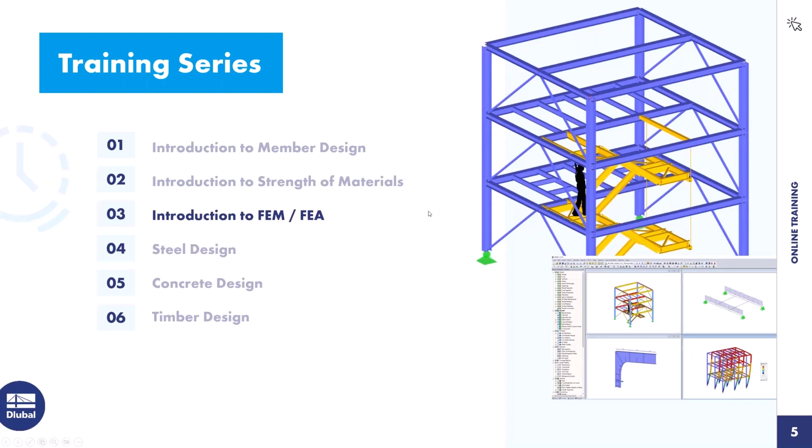In today's presentation or training, we will go through several different topics. First, I will introduce you to the basic principles of the finite element analysis, which means I will just do a few slides on the basic principles so you can remember the stuff you may have already learned in your studies, and have a better background knowledge on the stuff we will do right here. The next point will be an introductory example with a continuous slab, followed by a short theory on the plate mechanics and plate calculation theories.

With the last two topics, we will go on to the nonlinear calculations, so the more complex stuff. Not really hard into theory, but we will show you what RFEM is capable of. And the last thing we will inspect will be the singularities, so one kind of big problem in the finite element analysis, and we will try to figure out how to solve them or at least minimize them.

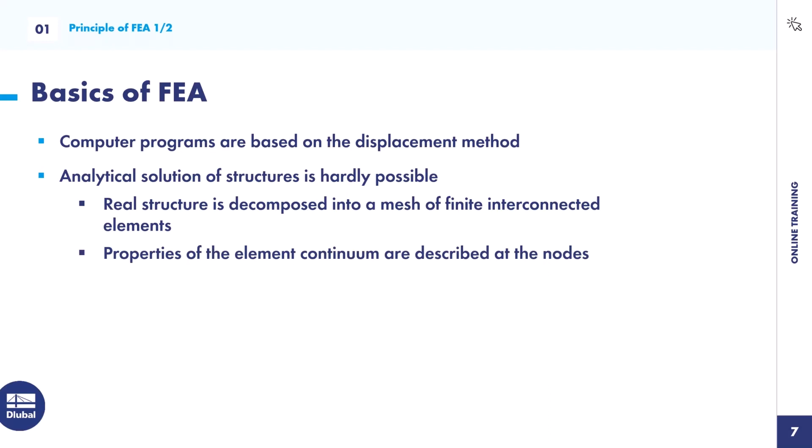This means at each border from one element to another element, you have, for example, a displacement in z direction, and it must be equal. So you have some equations which have to be satisfied.

And for inside the element, we have approximations. So there are different approximations and several programs can use different approximations. Also, there's the difference between linear approximations or third order approximations, which would be a more exact calculation, but also result in a more demanding computer power.

The next thing would be the discretization. This is an important term in the finite element analysis. The discretization means that the structure itself is decomposed into these finite elements, into these small elements.

And to make it a bit more clear, we have it also in a sketch where I will explain it just simple in 6 easy steps how a finite element analysis calculation is carried out. So the first step would be the discretization. That means we would split up the model, in this case a slab with an opening, into its small elements.

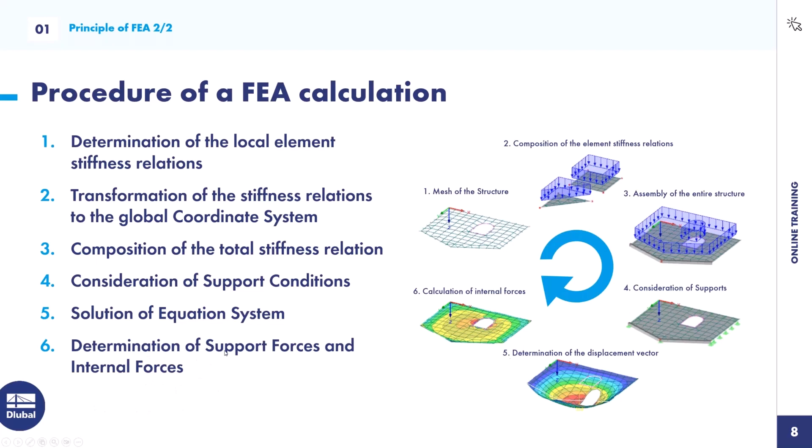Now we can just start on modeling. I will just enter RFEM. So if you model along, you're welcome to also open RFEM 6 now. And what we will do is we will create a continuous slab, and we will adjust the mesh size for the same slab, and we're gonna inspect the results. So we're gonna inspect how the mesh size will influence our results. Also, we will compare it to a simple beam, just like one of the easiest structural systems. We will investigate and inspect the problems of the mesh size.

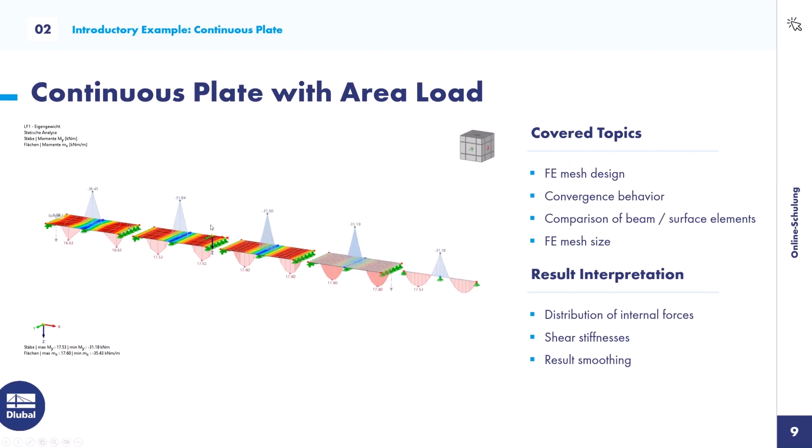So now our RFEM should be ready. Not quite yet. But okay, in the meantime, we can also do just another poll.

I prepared one according to the discretization. Let's go. What did I mean with the discretization in the finite element analysis?

Okay, perfect. I will close the poll. And the result, it's quite surprising. I never had this before. So 100% of you were right. It's the decomposition of the structure into small finite elements. Perfect.

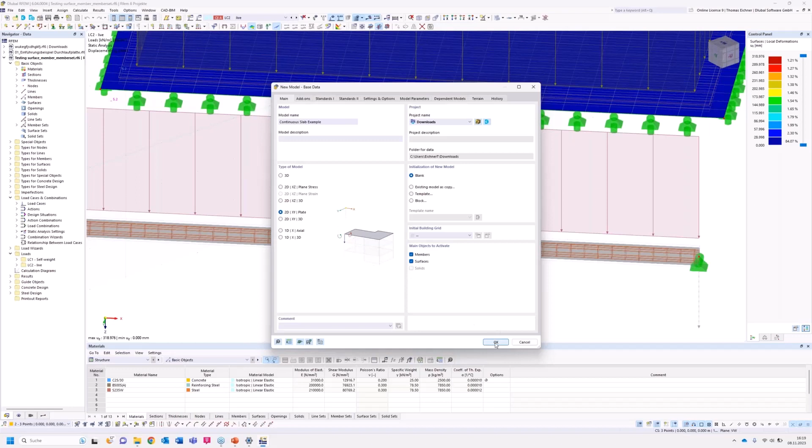With OK, the new model will be initialized, and we get a completely white screen, just with our global coordinate system at the origin and our complete guidelines for modeling.

Since we want to start from zero today, and the basic program option is to use the materials, sections, and thicknesses from our last model, so we don't have to create them each time completely new, we're just going to delete all the previous basic objects. That's done right here at 'delete all basic objects'.

Now we are at our free model, and we can either use this view cube, or these buttons, to change our view on the system. We will want to look in the Z direction from above, so we'll press this Z direction button, and then we are ready to go.

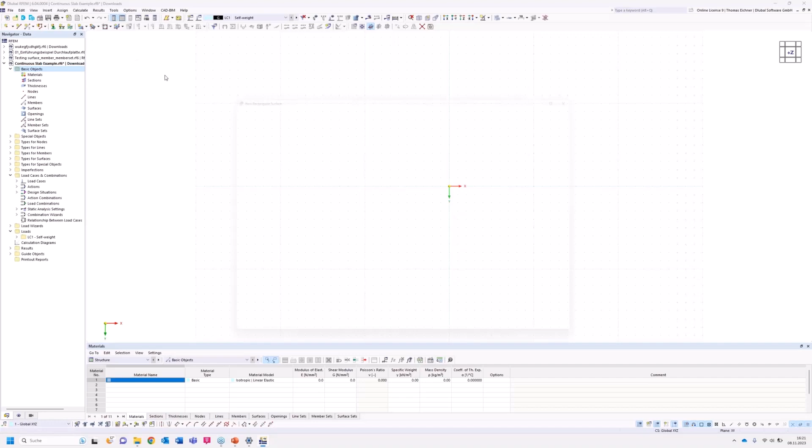Right here we can create our thickness. Just for your knowledge, if we don't have a thickness and try to press OK, it will warn us that we have to create a thickness. So the program won't let you do complete nonsense - it's going to help you at each step of your modeling process.

Now we'll click here, and it will automatically start the dialog for the thickness. We will go for 30 centimeters, meaning 300 millimeters, not 3000 of course. Then we'll continue assigning a material to this thickness. For the material, we have a few options.

We can either go into this library - the book symbol is always a library - and filter it by region or material subtype. We could also search here below, or alternatively we could just search directly on top.

That means we will go with the German one - I'm from Germany, so I'm only using the DIN norm. It doesn't really matter for C30/37 since it's standardized for the whole of Europe, and it wouldn't make a difference to choose something else here, at least for C30/37.

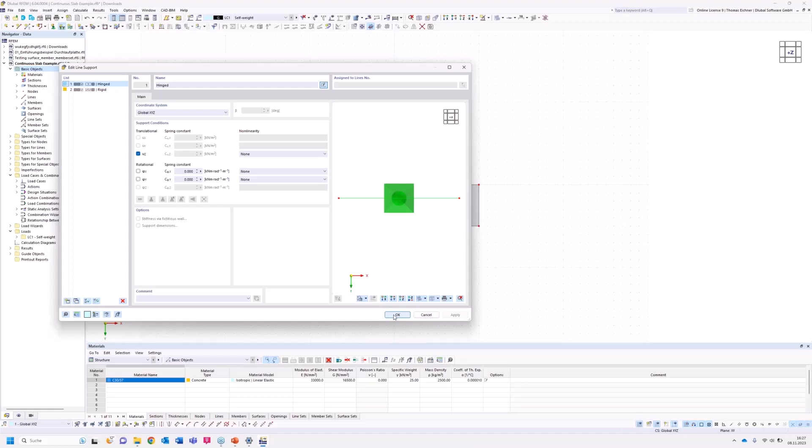Okay, we can then apply it, and by clicking from the right hand side to the left hand side, we will apply it to every line that is cut with our rectangle. So after this is done, we see...

We have now our support. We can also adjust the size of our support, and we can continue on.

This was in the presentation, I think about step 4, where we block some degrees of freedom. So we strike out some equations from the K matrix, and we also strike some degrees of freedom in the U vector.

So now we have the K matrix ready. We also modified it with boundary conditions, and we have the U vector also modified, though it's unknown until after the calculation.

And the last part would be the force vector. So for the force vector, we're going to make it simple and just apply an area load of 10 kilonewton per square meter.

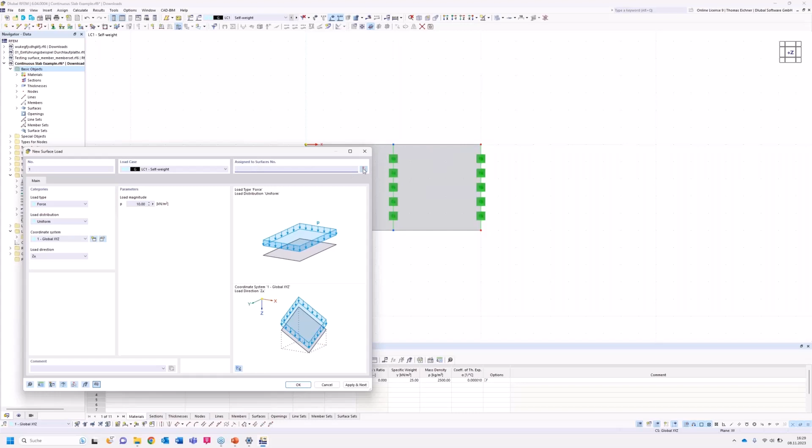We could just enter surface 1. Since we only have one surface, it will be surface number 1. We could select it, or we could just leave this empty, click OK, and select it afterwards.

After applying it, we're going to inspect the appearance of the load. Back in the view from the top, we can see the system. And in the next step, we can just select everything we did...

...and use this button here. This means it moves or copies the selected objects. In this mask, we already see on the right-hand side what will happen. The selected one will just be copied or moved to another place.

So we want to have 4 plates, so we create 3 copies of the system, and we will move them 10 meters.

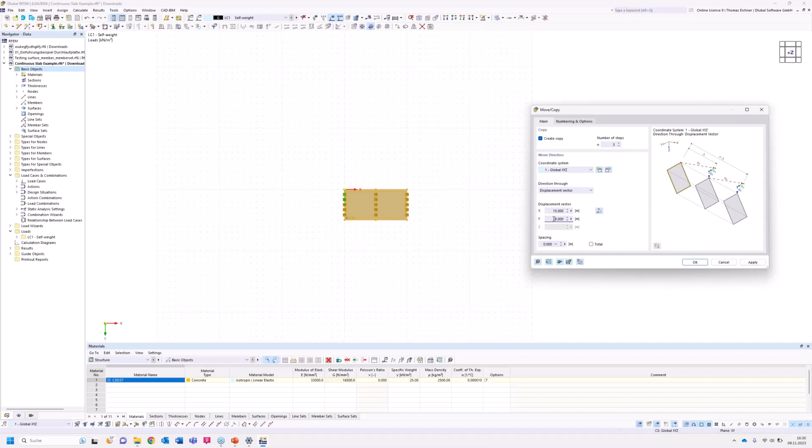Right, 15 meters. Our system is 10 meters long, and so we want to have 5 meters space in between, and then we want to have the next system. So we will have 3 copies with 15 meters in between.

After doing it, we will have them right here. And now we see our helping grid is not helping anymore on the last surface, but I need it for the beam, or I don't need it, but it helps me a lot.

So we will go into settings for our work plane and grid, and we will just adjust the number of grid points. I will just take way too many, like 200, and I will also adjust the grid spacing from 1 meter to 0.5 meter. It's not really needed, but it's possible, so I will just do it.

With OK, we can see the result. We have now a new grid, and it's over the whole system we want to go through and inspect the results on.

So the next thing we want to do before we model the beam would be the mesh size. Right now we don't have any specific mesh size for a surface.

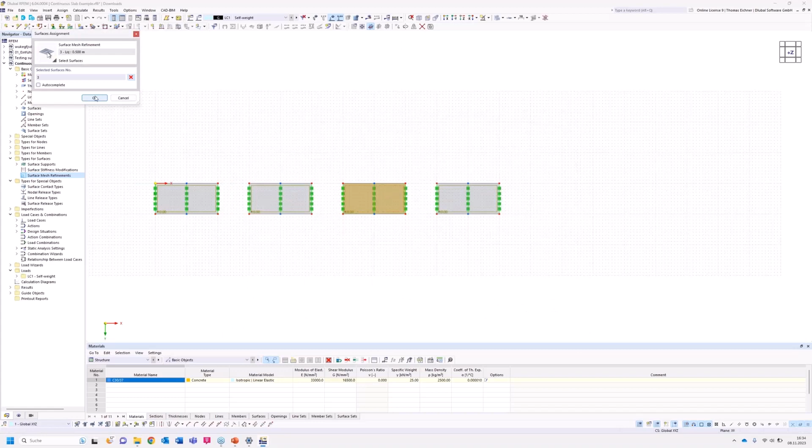Now we have the properties, but we didn't assign them to any surface. So we're also going through the different 4 refinements and assign them to the different surfaces. The first one with 2 meters for the first surface, the second one for the second surface, and so on. Rinse and repeat.

Now, after finishing the 4th one, we didn't apply it yet. We can either apply it right here, meaning now we can see something - I will explain it in a bit. But the positive thing about the apply button is we will stay in the dialog. So if we had more surfaces and wanted more mesh refinements, we could just go on and create new ones.

If you click OK, the dialog will be closed and it will be applied. It would be possible for our case as well.

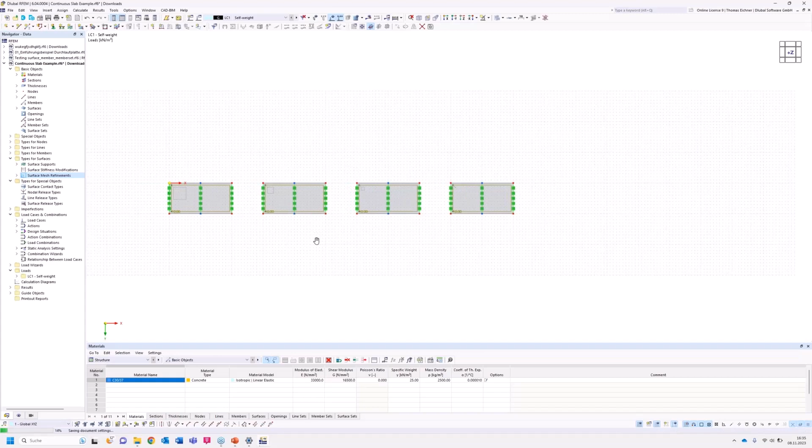Now we can also see these squares in our surfaces, and those show us how the mesh size will be. This will be very coarse and this will be extremely fine. You could estimate this will be round about 1,000 more elements than the first one - meaning maybe not 1,000 more calculation time, but let's say 5 times the calculation time. It's just an estimation.

So for the comparison, we will also create our beam. The beam will be done with this button on the top left side, this section. It will be a new one since we have none yet, so we go into this create new section.

We want to have the only material we have already, the C30/37, and we want to have exactly this rectangular object. The rest here doesn't really matter for us right now. I will go on with something later, but we could also inspect the section properties.

To adjust the size of our rectangle, we can go to this parametric massive section. And here we want to have a width of our system of 1 meter, so 1,000 millimeters, and the height of our system of 50 centimeters.

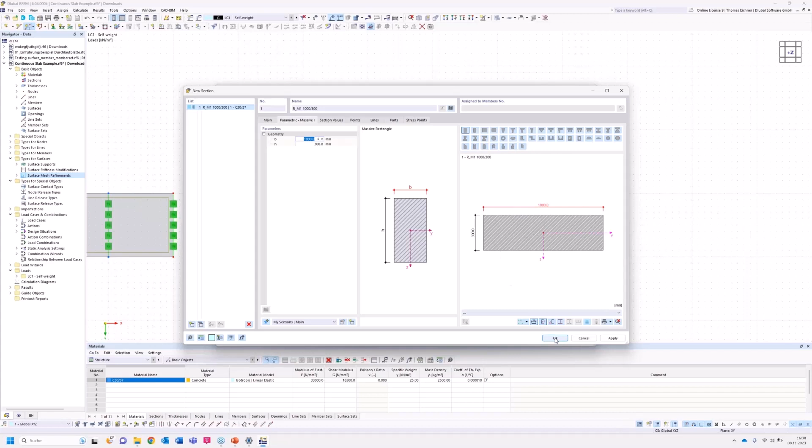We can press OK and OK and go on with the modeling. Now we will just go again and create this 10-meter slab - well, not slab, but our beam.

This beam will be divided since we need a support in the middle. We can just go on this member, go on divide member with intermediate nodes. I could also go on distance with 5 meters, but we will take the more simple method: one intermediate node, very easy.

We will also use a new function here, create on member node. I'm just clicking it and pressing OK. Now you see this blue new node. The special thing about this on-member node is we didn't divide the member. This is 1 member. If we didn't check this function, it would be 2 members now.

So it's just for more complex systems. You don't want to have hundreds of thousands of beams just because you have beams coming into other beams and so on. For our purpose, this doesn't really matter and we could go for both options.

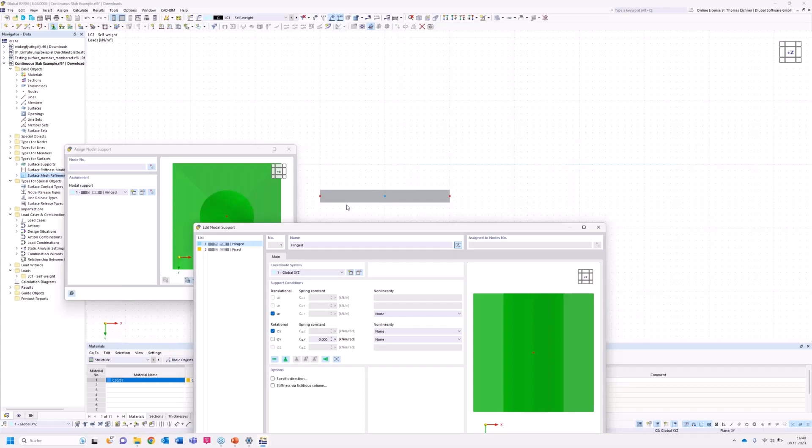So after doing this, we have it adjusted right here, press OK, and assign them to all the nodes. Last but not least, we can just add our member load, again with 10 kilonewtons, this time per meter. Press on the slab—well, not the slab but the beam—and we're ready to look at this in 3D, since it looks quite cool now.

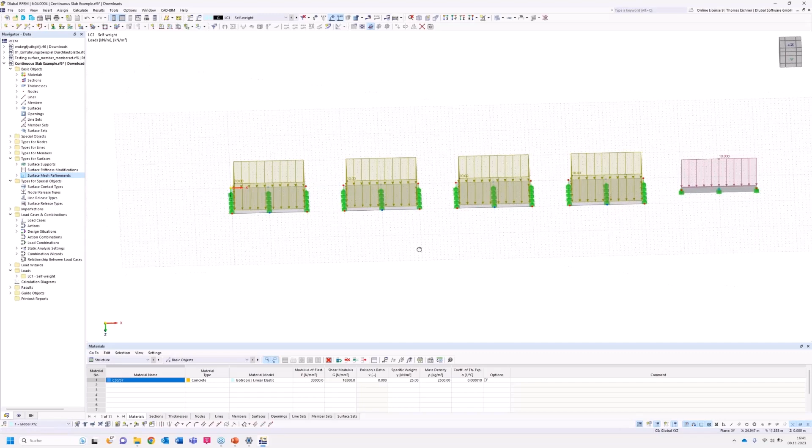Just a few simple steps and we have our systems. One more thing, we can also do this for loads. We can adjust their size. Before the calculation, I want to do two more things. That will be, again, view in its Z direction.

Now we will create our result section. Result section is a special object, so we find it in the special objects. We double click it, and we just use the basic settings and take our first two nodes from here, from the middle left to the middle right. We press OK. Now we can see we have added this result section.

Now for better investigation of our loads or of our results, we will also deactivate the self-weight. So we go into the load case and deactivate the self-weight. Now we're done and ready to calculate the system.

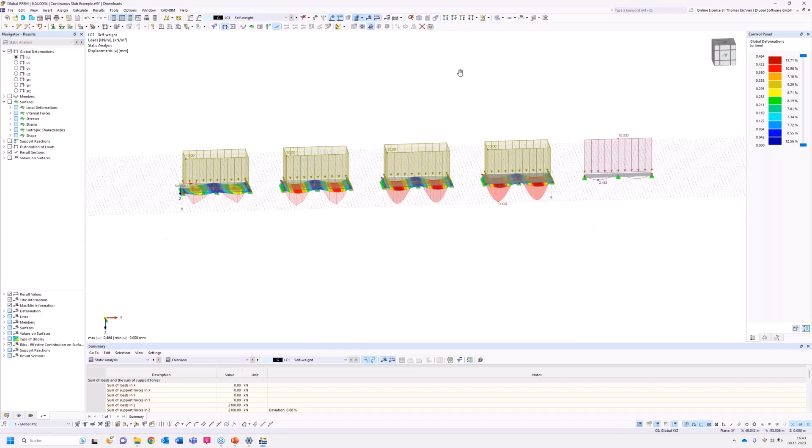So we have our results now. We have our results also on the result sections. We can adjust our values to be displayed right here at the values on surfaces.

And that seems to be wrong. We have to go result sections, values on result sections. There we can go on local extremes. And that means we just have our results.

Now we can see the different shapes and we can compare the deformations. We can see we have here 0.34 millimeters, I meant. And we have here on our comparison beam 0.46.

So there's a big discrepancy between this coarse model and our beam. This 0.464 seems to be really accurate, but also our not-so-fine mesh did result in comparable deformations.

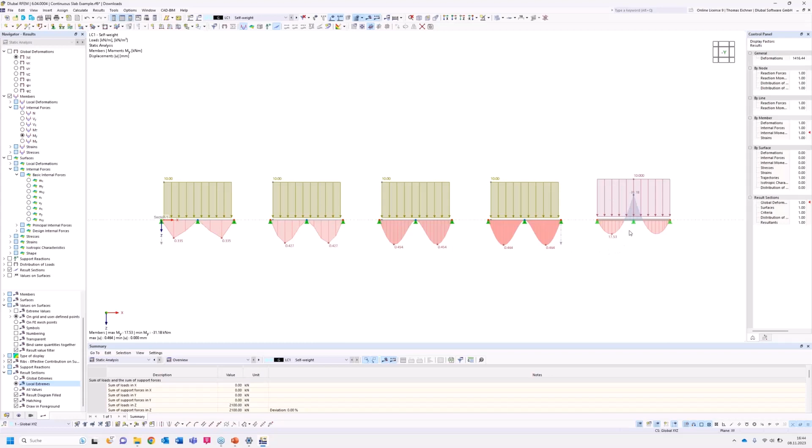We'll also investigate this on the internal forces. So we go on the members, the internal forces, and we will look at the moment about the Y direction. This is the moment rotating about the Y direction for beams.

For surfaces, it won't be the My. The My should be 0, but we will go for the Mx. Why is it now the Mx and not the My? For surfaces, there's a different definition for internal forces.

Mx means now we will follow the x-axis. We will cut the slab with a plane perpendicular to the x-axis, and then we will rotate around the corner of the cut. So it's a cut perpendicular to the x direction, and then we will rotate around it.

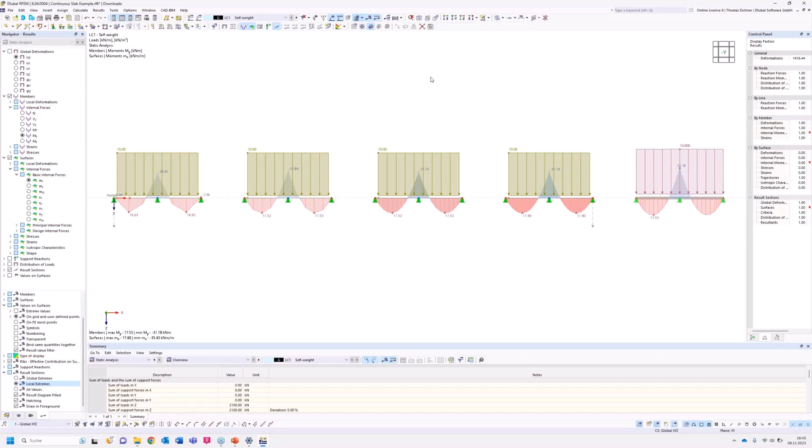Now we can look again into our result investigation. I will disable the loads for here. And now we can see, okay, there's a difference in those.

Also, now I will go into the section result diagrams, right click on the section arrow, then go into result diagrams. And here we can see it already. Now I will, let's see.

What's now happening is that I will show it in the general menu since I want to use the 3D. I will also disable the results for what I want to show you, since we can see now the mesh.

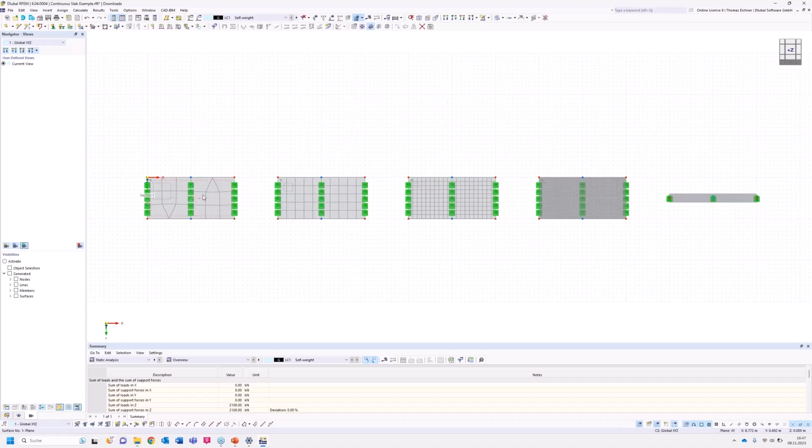The mesh seems to be fine for this right three types. But on the left side, we see it's not quite fitting in the system. We have also a triangle. Just a hint, we want to avoid triangles. We can't avoid them always, but we want to avoid them. They won't lead to the best results—not completely wrong results, but let's say not the best results.

And we also see we don't have an edge of elements now in the middle here. And for a single span beam, we would estimate the maximum moment in the middle. So for this system, let's go back into the results.

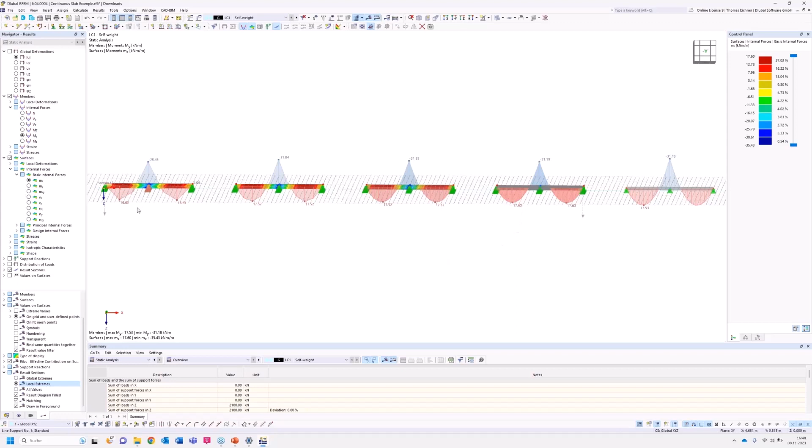We can see that here is our maximum on the left side, but it's not exactly where it should be. So the mesh, if it's too coarse, it doesn't only influence the exactness of the results, but also the location of maximums and minimums. And that's what needs to be avoided in any case.

So the next point would be which results seem fine. In this case, we will look at the top moment. We have here almost the same results, seems fine, of course, since it's very fine. But the difference between this 31.35 and this 31.18 is not that much, so I would also take these results. These results, I would take them as well. I mean, they're really close, about 1% maybe difference.

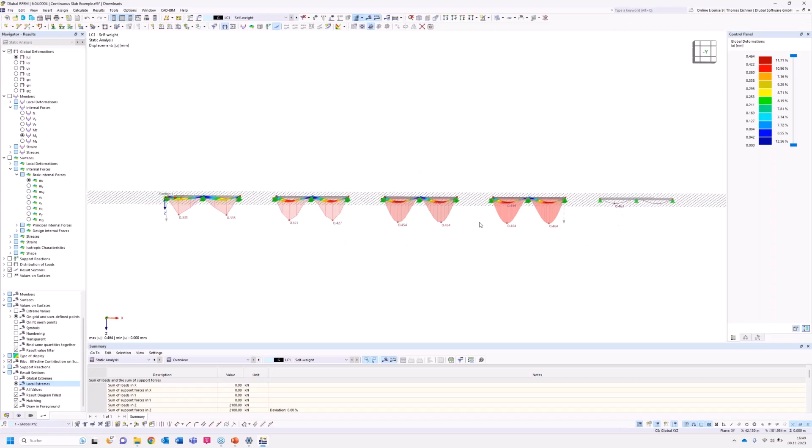But when I go into deformations again, it looks quite different, and that's why I would go for this system here. And that leads to my rule of thumb, learned in my studies, for the use of mesh size.

So I'm going to show the mesh again. We have like 5 elements right here, and here we have quite more, way more. The rule of thumb I learned was 6 elements per length, so there needs to be 6 elements in the region we want to inspect.

That's for design. What I learned in this company is also that for bigger models, sometimes you want to design parts of the model and use other parts just for load transfer. If parts of the model are just for load transfer, 4 elements are enough, maybe even 3. But however, this one should be avoided in any case.

Okay, so now we're finished with our first model already. The next thing we will do would be some nonlinearity. So what I'm going to do first is give you a short introduction into plate theory, and afterwards we will continue with this model with some nonlinearities.

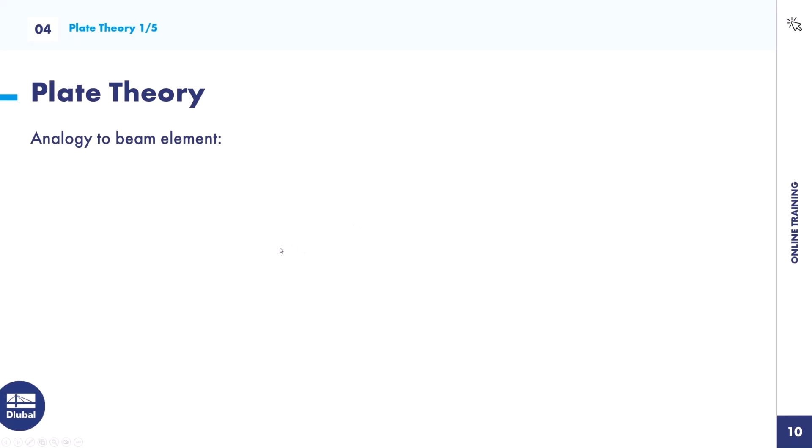For the plate theory, we have the analogy to the beam elements. For beam elements, we have on the one hand the Bernoulli beam, on the other hand the Timoshenko beam. The simple difference is the Timoshenko beam also considers deformations from shear, so it isn't rigid. For the Bernoulli beam, the cross section remains plane, same as for the Timoshenko beam, and the cross sections remain perpendicular to the member axis. This is not the case for the Timoshenko beam.

This can be used completely for the plate theory as well. We have the Kirchhoff plate theory and the more exact Reissner-Mindlin theory. We have for both systems the linear elastic material law from Hooke. We have geometrical linear and small deformations, cross sections that remain flat with no warping appearing, and a constant thickness. But for Kirchhoff, we don't consider the shear deformations, and for Reissner-Mindlin, we do consider the shear deformation.

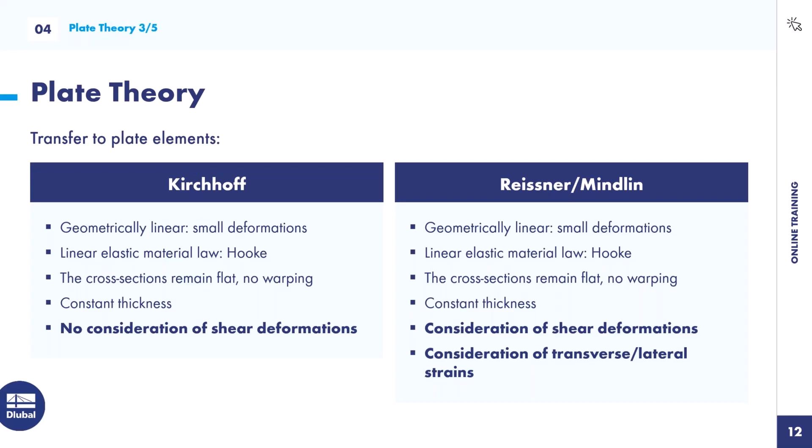For plates, we also consider the transversal and lateral strains, that's the Poisson's ratio in the program. We set it to 0 to have a better comparison to the beam element. We could have also just taken the Kirchhoff theory. For this Poisson's ratio, let's explain what it means.

The Poisson's ratio defines the ratio in this equation. If you pull a beam and it gets longer, the new volume right here must come from somewhere, right? And it comes from this place here, so the beam gets longer, but it also shrinks in size. That's about the Poisson's ratio, just the ratio of the longitudinal strain and the transversal strain compared to the longitudinal strain.

So when we apply this to our plate elements, again, we had no consideration of shear deformations for Kirchhoff, and we had consideration of shear deformations for Reissner-Mindlin. The main point is Reissner-Mindlin is more accurate, and it's the theory of thick plates, but it can be used for thin plates as well. In RFEM, you can choose it in the calculation settings, but Reissner-Mindlin is the way to go. Kirchhoff is also good for thin plates, but let's take Reissner-Mindlin.

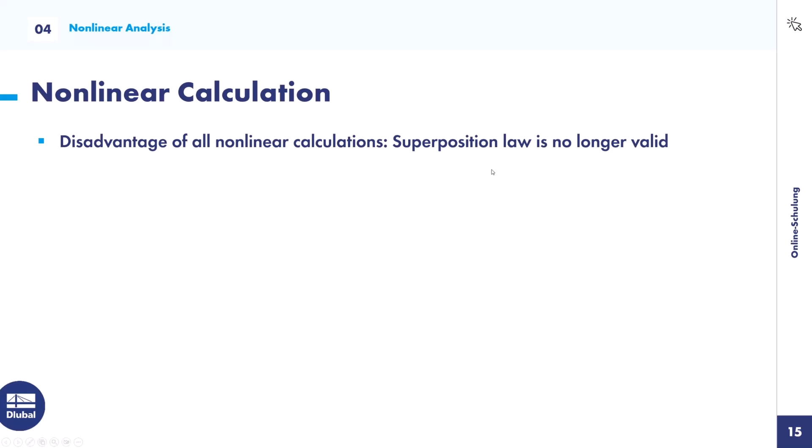Next point would be nonlinear calculation. Nonlinear calculation means something is nonlinear, right? The problem with nonlinear calculation is we can't superpose results. For example, in our early studies in statics or mechanics, we had just a dead load case and a live load case, and we separately calculated them, and then we summed up the results and it's finished. This is not possible for nonlinear calculation.

The typical application areas in RFEM 6, or in general, are geometrical nonlinear calculations. In German it's called first order and second order; in English it's geometrically linear and P-delta calculation. There's also the theory of large deformations, which would be third order, but we will go for second order.

For second order, the program does its first iteration: it calculates the system with its forces on top, calculates deformations, and then goes into a second iteration. It uses the deformed system, applies the loads again, and repeats the process. This only stops when the added deformation is smaller than the defined error tolerance.

Okay, that's for the geometrically nonlinear stuff. Then there's also nonlinear material behavior. You may know nonlinear elastic material models, and there are also plastic material models. You can imagine the superposition problem with a nonlinear material.

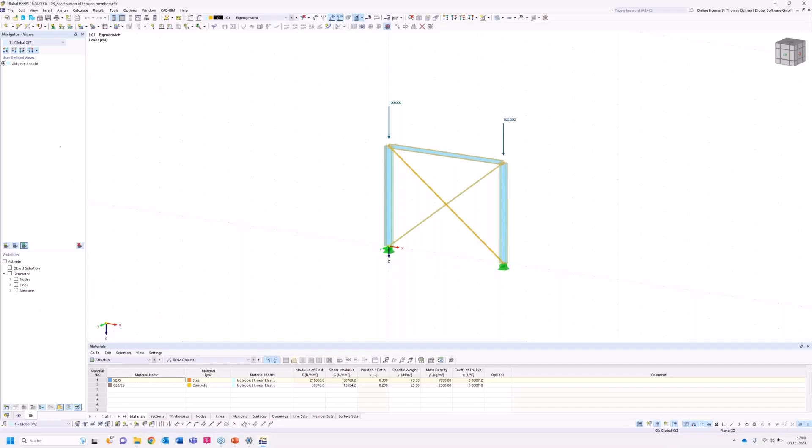Okay, that's it - now I can show you another model, the reactivation example. So we have this system here, just a frame of steel objects, and in the middle we have so-called tension members. That's a nonlinearity - it means they can't handle pressure. If you pressure them, they will deactivate and just can't do it. But of course you can pull them, and they will have tension forces and be able to manage it.

So in our system, we have this frame loaded with 2 times 100 kilonewton, and we can imagine what's going to happen right now. I will go for theory of first order first and calculate the system. Theory first order won't have any horizontal forces, so as estimated, it won't have any deformation in the x direction - it will just be pressured down.

We can also see the color of these members - they got gray, which means they failed, they deactivated. They're just not there anymore, you could say. For this first theory first order, it was no problem since they are not even needed.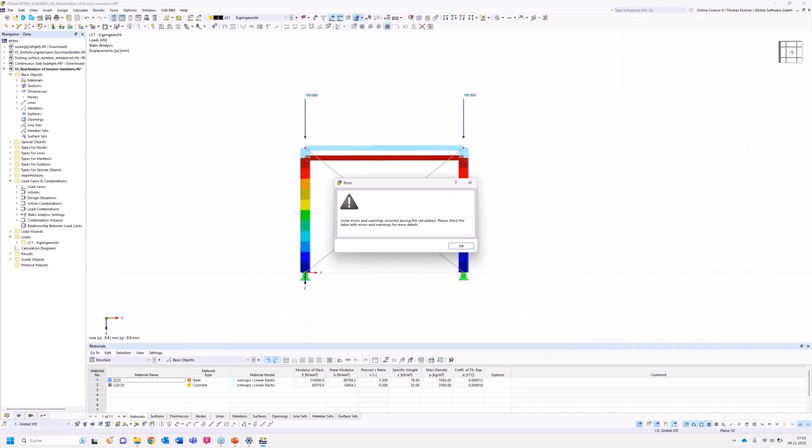Now we will switch to theory second order, and I will just check - okay, perfect, that's everything okay - and we will calculate it. So theory second order, there will be some imperfections implemented in the program itself, meaning it will deform slightly to the side and start the calculation. Problem is, we now have an unstable structure - it's movable in the x direction.

Why? Well, both of those objects just failed - they got pressured and failed out. In reality though, if the system goes down and then to the side - I'm not sure in which direction it will go, but let's say it would go to the left side - then there will be a point where this member reactivates again and holds it back, right? And that's what I want to show you. Even though there could be problems with stability, there can be a solution in our static analysis settings.

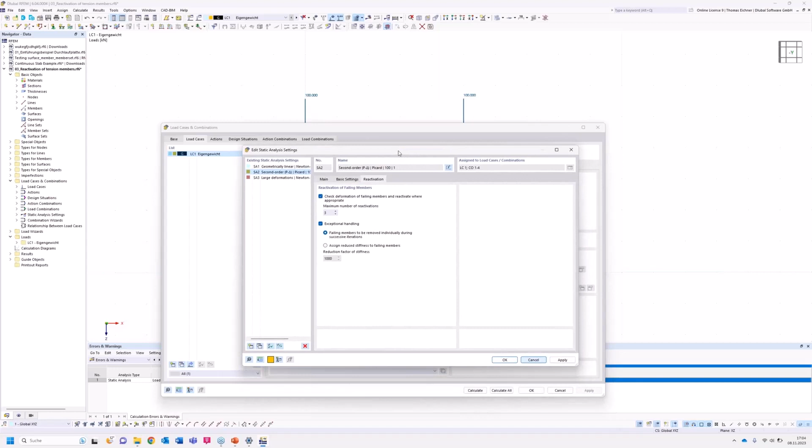That means we could go for this reactivation tab, exceptional handling, and then go for the failing members to be removed individually during successive iterations, so they can't fail at the same time in an iteration. We will go for it and calculate the system again.

Okay, now we can see we have this model. Yeah, it's stable again since I predicted the wrong direction, but this one is in again, it's activated again. Perfect. Now we can just switch into my next example.

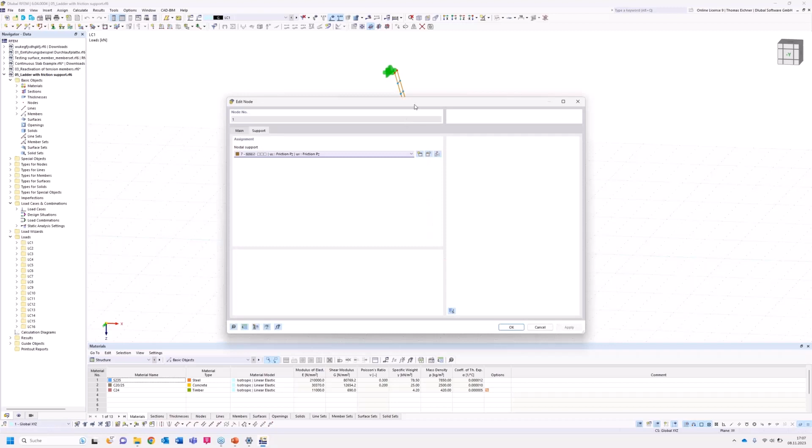So now we have a ladder. We have just this ladder and it lands on top of a building on a construction site, and it just stands on the ground. That means we have here some nonlinear supports. And those nonlinear supports have a friction. We can go into this friction.

And now we can see we have for this translational degrees of freedom, the friction entered. The friction appears here as a new one. Could also go here, friction PY, and it adds on top. We'll deactivate again and go into UX friction. Friction means in X direction, it can take a force which is 20% as high as the PZ force.

So when we go into the system, we can see I create some load cases where a person of 1 kilonewton, so round about 100 kilograms, will go from the ladder to the top.

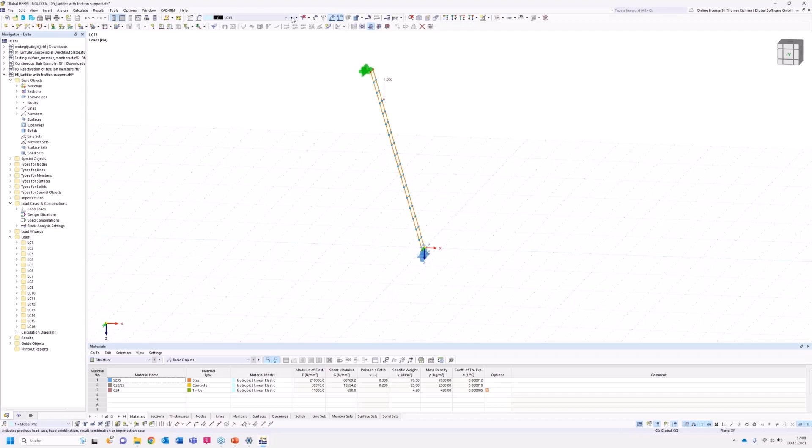Now we can calculate the system for a second. And I need to calculate all load cases here.

I will also show the support reactions. Now we can see the deformations of the ladder. They don't really matter for us right now. What matters is the support reactions.

We have here per support 0.5 kilonewton. That means 20% of this 0.5 would be 0.1. That means the support can take 0.1 kilonewton in X direction. Since the vertical force won't change, the limit value won't change.

But when we step up the ladder now, we can see this value rising. This results from the equilibrium of moments. As we go away from the start, the distance of this moment will be higher, and therefore this force will go higher. Way simplified.

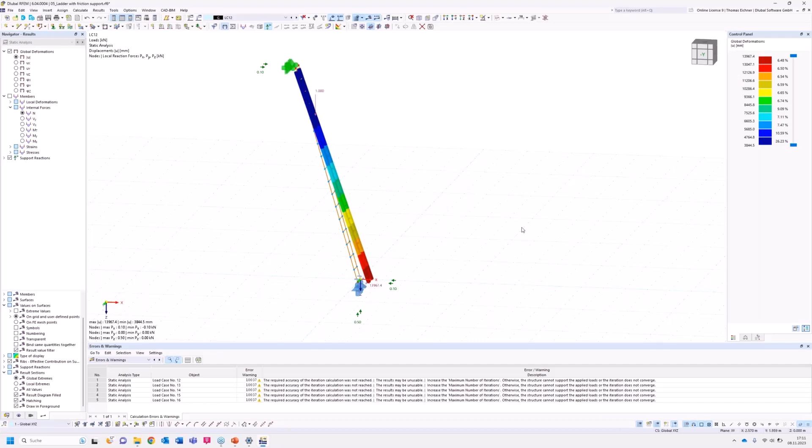So that would be not so good, but we can investigate such problems with RFEM. What I want to do now is add a new load case for it, so a load combination in this case. We will add one and go for the linear calculation, and we will add now the last load case.

So if the person is standing on the top ladder, and now I want to see why is it said that if someone stays on the bottom, on the last step here, or on the first step here, why is this helpful? And that's something we can always also investigate. Therefore, I just need to, okay.

And now we calculated it and we can see, yeah, he can stand on top. Why? We have now double the force in vertical direction per support, which means also double the allowable force due to friction. And that's why it always helps when someone stays at the first step if the other one is going higher.

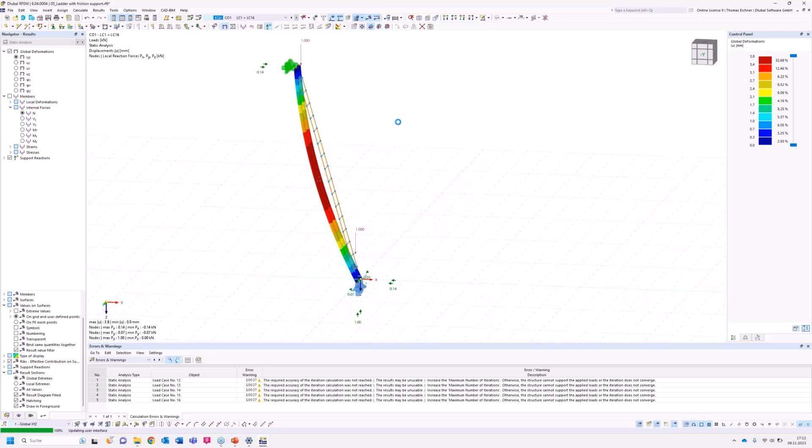And that would be our tension specimen. So we're in a testing bureau. We have, in this case, a surface, a steel surface. It's fixed on one hand side. On the other hand side, we will pull it. We will just pull it.

Okay, now we're done. What I did here, we have steel S235. We have a thickness of, I think, 3 millimeters. We have a height in between of 10 millimeters and here of 14 millimeters.

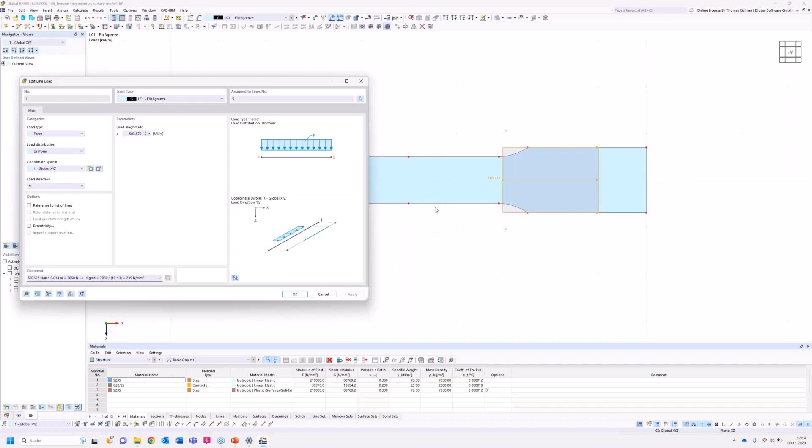That's why I created a force which results in exactly the yielding force for this section part, for this 10 millimeters height. So this 503.572 kilonewton per meter results in a stress of the surface of 235 Newton per square millimeter. So the limit of the system.

I also created another load case where I just increased the load for a bit, just a bit, but it should be more than 235 here then. And that's what we're gonna investigate now. Gonna calculate the system again.

And yeah, now we should have the results. Okay, now we have the results. At first, we're going to look at the deformations. You have here 0.1 millimeter, as well as for this increased load, we have 0.1 millimeters.

Go back into this limit case. And now we will go into our equivalent stresses. Our equivalent stresses should be somewhere here. We will use the standard formulation in form of the equivalent von Mises stresses and show them. Now we will see some colors. Okay, but we don't know more what does the color mean here right now.

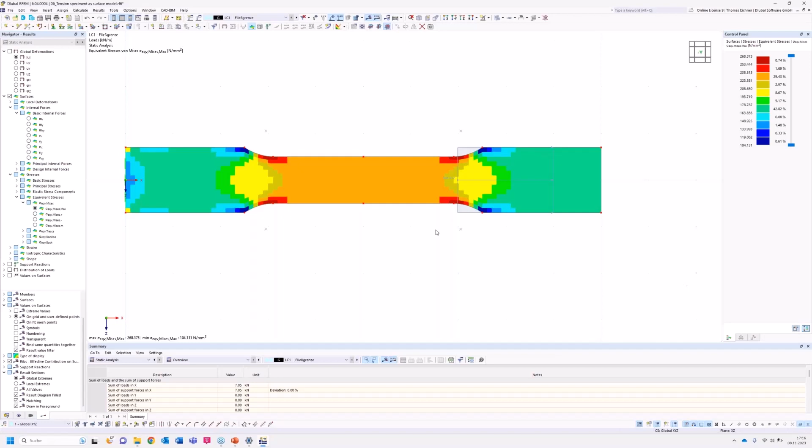But for some better investigation, we can also use user-defined values, and I will go just for the upper limit, 235. This means we can see now we have dark red, everything that is in a yielding region, above 235. Now we see 17% of our finite elements are yielding.

And we even have some elements which have 269 or 268 Newton per square millimeters. The material can't do it. So why is it there? I will show you in a second.

But first, I will look into the other load case, where I increased the loading for a bit. Now we have 26 to 27% of yielding elements. The rest didn't really change. We also have overstressed material. What's the reason for it?

We have here material defined. Now we will go into this material. We have an isotropic linear elastic material. Since you're students, you can get a free version of all this RFEM. And the best thing is you can also have all the add-ons for free.

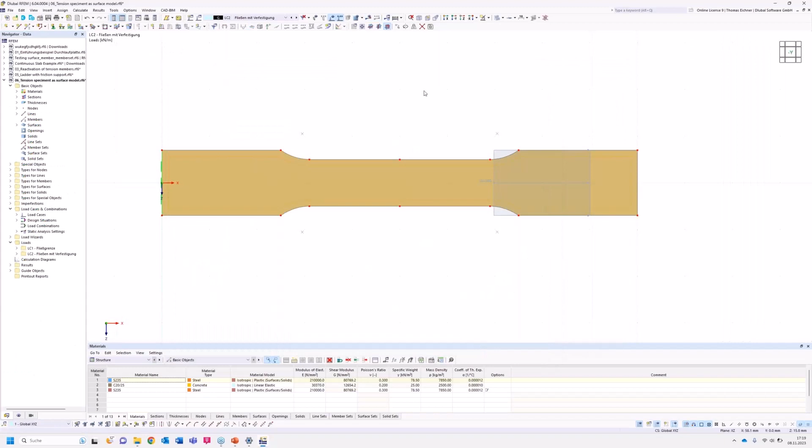This should result in redistributing the forces. So if an element would get, like in a linear elastic one, a force here, this force should redistribute to another element. And that's what we're gonna use now. We have it now and we will calculate it.

You can also see there were more iterations necessary. But the point is, now you see here the upper limit, nothing exceeded the 235. Just a bit here, just a little bit. I think we could change it if we would adjust the mesh size. But now it is as expected. This whole system is at its limit, and it would yield now.

Only 1% are over the material limits, which means if they are over the material limit, I will just go into the material again. They are in this region, so they can do more, but they need to have more deformation for it.

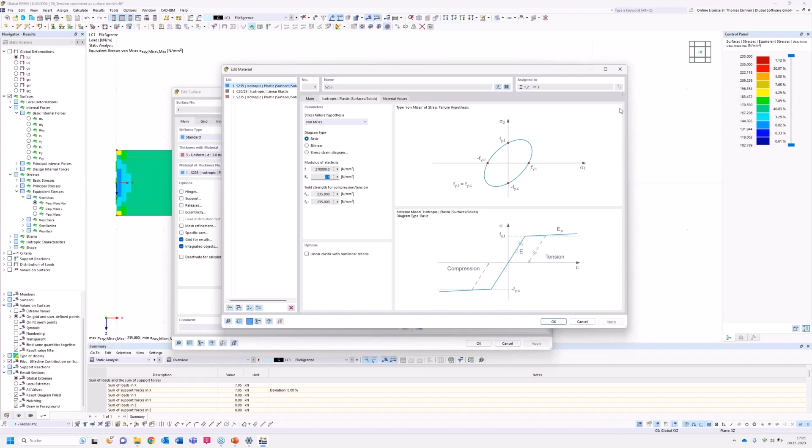And that means if we now go into this one - okay, before I do it, I will just show you the deformations again. Just remember we had for the linear elastic model 0.1 millimeter in both cases, and now we also have in the first case for the nonlinear model 0.1 millimeters. But what's happening now? So we go to the bigger force, and we can see now 8.2 millimeters. Means like 82 times the deformation than we had before.

And we can always also see, if we activate the video for here, this Poisson's ratio. You can see how it's gonna get thinner here.

So now, in this one, we can go here again and look at our yielding, at our equivalent stresses again. And now we see, okay, now we also have 24% which are over our yielding limit. But they are not much over the yielding limit. It means the force redistributes over the whole height of the system.

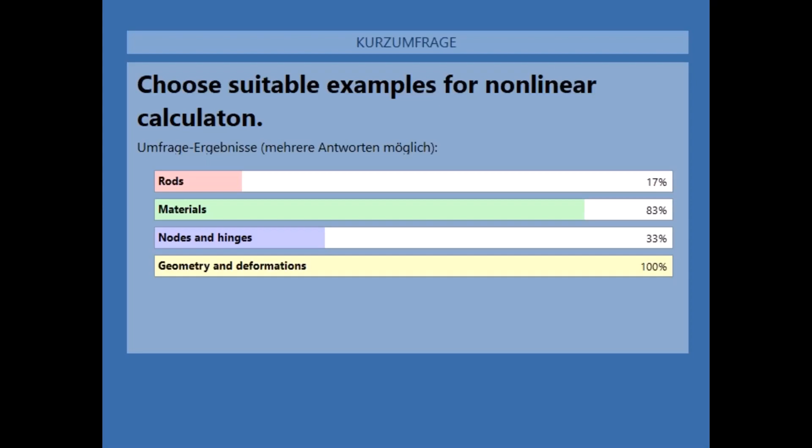Okay, some did vote. So I will close this one and show the results. Okay, just as a hint, every answer was right. So every 4 answers were right. Everything can have nonlinearities. Rods can have nonlinearities, materials, nodes and hinges and supports, and the geometry with this P-delta effect. Okay.

So what we're going to continue with now is the last part, just a short part of like 10 more minutes. It's the main problem of finite element calculations. And what is this? It's the so-called singularities.

Singularities are a big problem since they are discontinuity in the calculation model. So it's not a physical and real problem, but a mathematical problem. Means the results are just useless, kind of.

And this can be imagined, for example, at a point load. If you have a point load and you want to look at the stresses in the surface, and you go directly under the load, you have like no area to distribute the force on. Means you have infinite stresses. And the further you go away from this central point, you will decrease the stresses.

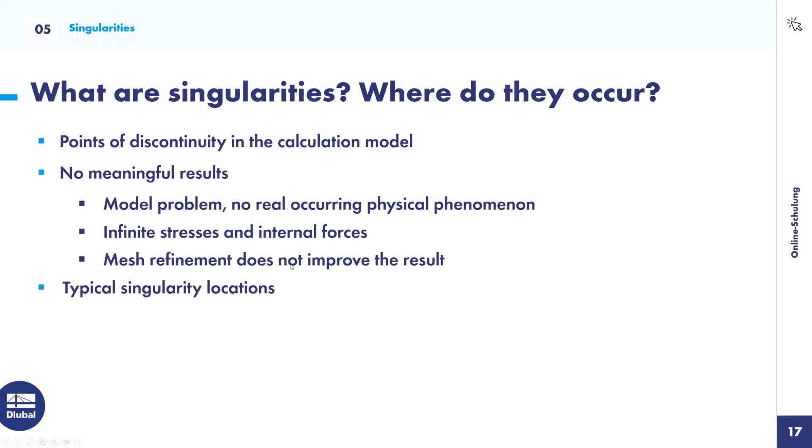Some typical locations are point loads or point supports, nodal supports, line supports, ends of line supports, also openings and corners of walls, also ends of walls since they act as line supports, and jumps in stiffness, for example due to material or thickness. That's all already for the singularities.

Now I will just go into the model and go over one last example.

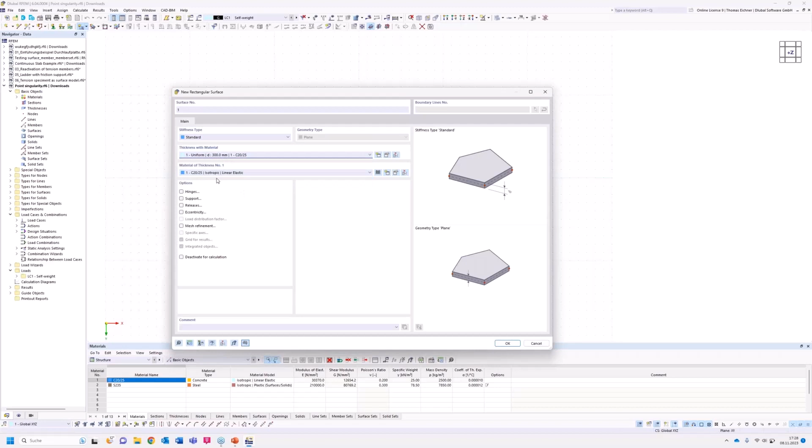Now I will just model this and show you how to speed up your modeling at first, and then I will show you how to treat with singularities. Means we have here right now a surface with C20/25, a thickness of 300 millimeters. That's okay, that's the pre ones from the last one.

Then we go for, what do we do now? One second, I had something in mind for it. Eight times 6 meters. Exactly, that's what we do. Next step, we will add...

Okay, seems like Thomas's presentation interrupted.

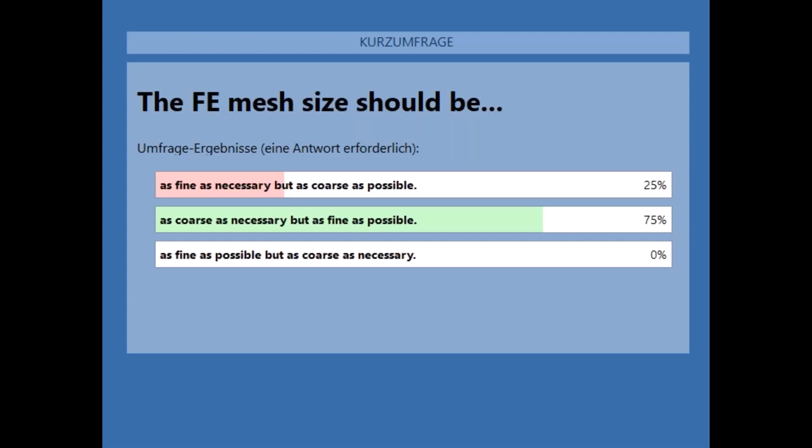So now for the last two models, they shouldn't take too long. If you want to, you can start, and I will create them from zero again. If you want to, you can model along. So let's start by deleting all the basic objects again.

And then we're just going to start now on the left side by creating first our material. So I'm going to double click it and start by creating our concrete of grade C30/37.

Now I will use a Poisson's ratio of 0.2, so I won't adjust this, and confirm with OK.

So now we see we have here one material. The color of the material is blue right now. This means the material is not used in our model.

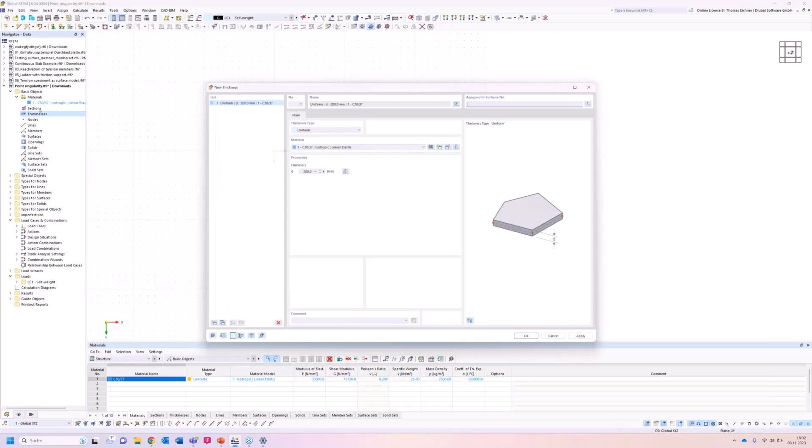And in the next step, we will create our thickness for the plates. This would be, again, 300 millimeters with this C30/37.

So now we have also a thickness. The thickness is now blue because it's not used. And the material got now the black color since it is used for our thickness here.

So in the next step, we will create our first surface. We will do it again with this rectangular surface, and we'll go for this 8 by 6 meters.

Okay, so we have our surface right here. By the way, by double clicking the middle mouse button, you will center around the whole model.

In the next step, we want to just set a point out in the middle of our surface. That's what we're going to do next. We just create a node on the middle of the surface. And that's the point where our load comes at.

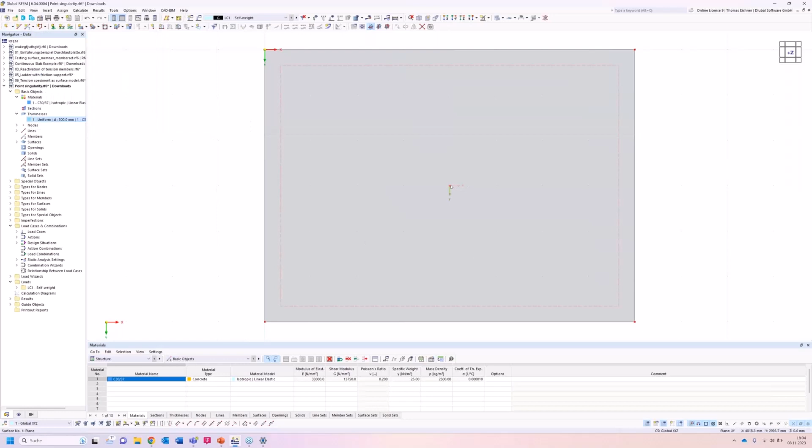So we go on nodal load and set here like 10 kilonewton. Or let's say 100 kilonewton. Let's make the results more obvious. We will do 100 kilonewtons.

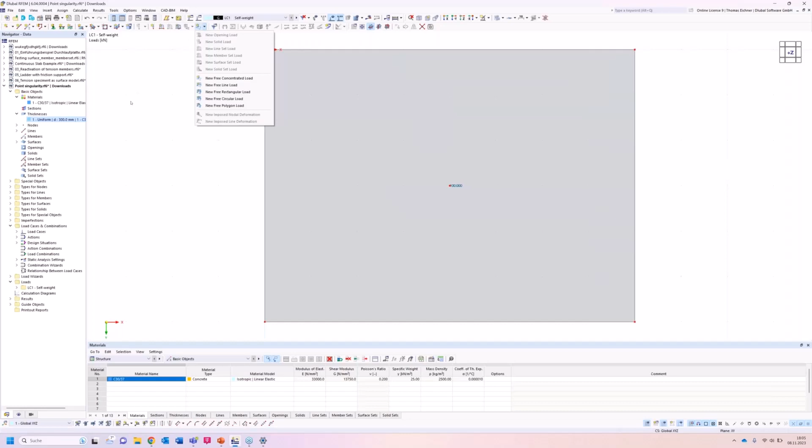And we are going to set them on our newly made node in the middle. There would be also another possibility with these free loads, but I will show a free load later on in the next model. It's kind of the same amount of work to get to the load in the end, so we're good with just this procedure.

Next thing would be we just do easy line supports on each corner. Therefore, we use our predefined line support hinged and select all those corners, all those edges.

Okay, so we're done with the surface. And in the next step, we would do, like in the first model, the option to copy the selected objects.

We want to do one more inspection for the mesh refinements in the end. We want to have 4 surfaces with 4 different mesh refinements. We had 8 meters in length, so I will displace them by 10 meters, and the amount of surfaces I want to create is 3.

Input those values and click apply. Now I see I did something wrong, so I will go back, press Control Z, and do it again.

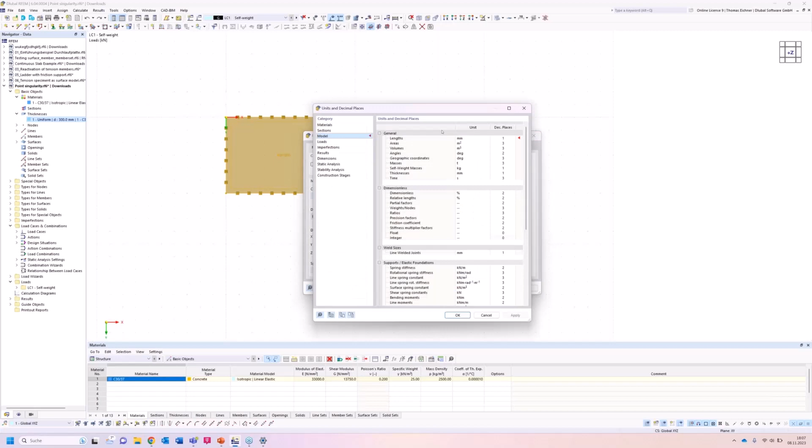But everywhere there's an input of length or forces or whatsoever, we have this button here below. It's our units button, and with this units button, we can change our lengths and say, okay, I want to enter them as meter.

We could also adjust the result exactness, so how many decimal places would be in there, but it's not of concern for us right now. So we will press OK, and now we have the right unit here.

Now we can take 10 meters 3 times, click apply, and we're ready to go. Now we see I did press apply, so we stay in this.

If I would press apply again, I would get 3 more slabs on the right. Also, if I press OK, I would also get 3 more slabs on top. So this time I will go for the cancel button, since I don't want any more slabs.

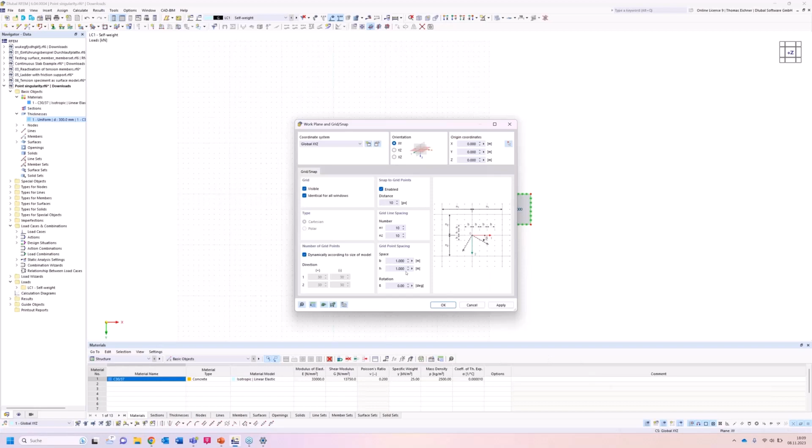Now I see again my grid is not around the whole model. That's why I will go into these adjustments for the work plane again, and since I'm not going to model any more things, I will just go for this dynamically according to size. Let's see what it's going to do to our grid. Perfect, it's just going to adjust the grid perfectly to our model.

Now there are 3 more steps. The first step is the mesh refinements, same as in the first model. The second step will be the section, so this special object of result section through the surfaces. And the third step will be the deactivation of the self weight.

So we will start with our surface properties. We go into types for surfaces, and there we go into surface mesh refinements.

With this done, we can just go for 4 new mesh refinements, the same ones as in the first model, and we will assign them.

Okay, now I'm at surface mesh refinement 4, so I want it to be at the 4th surface. Perfect, and then I can start from top to bottom, because it's a bit more obvious.

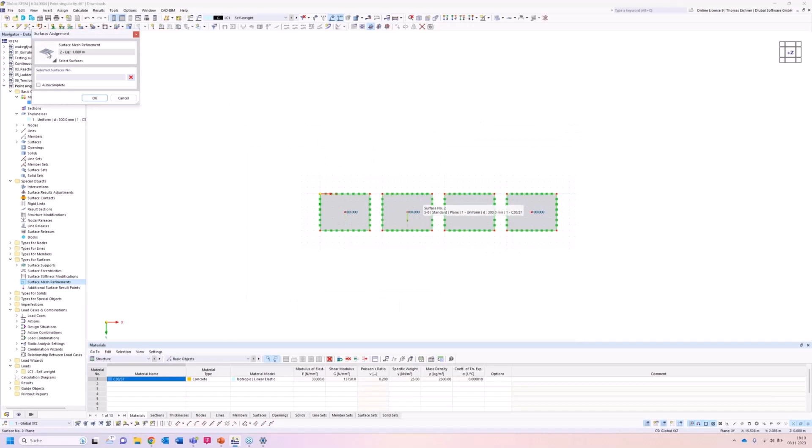Okay, so every surface refinement is assigned. We can click OK and inspect the size again. Since we did that already, I will just go on with our result section.

So we go for a special object, a result section, and create it via double click. We can select the leftmost middle point and the rightmost middle point, and just click OK, since our basic settings are okay.

So now the model is completed, and the only other thing I want to do is to deactivate the self weight in our load case. This is done. We could press calculate again here, but I will just go for OK.

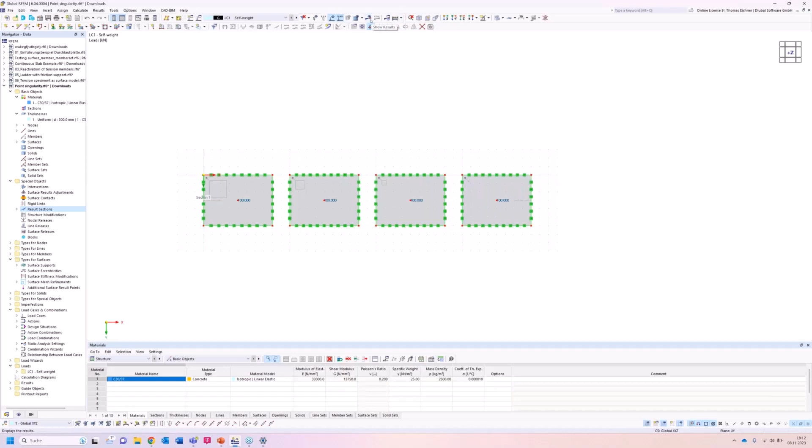And then there are different possibilities for the calculation. One would be the calculate button. You could also choose if there would be different load cases to just calculate one load case. And the other possibility is just to select show results. Since there are no results, it will start the calculation to show you the results.

Okay, so now we're in the model again. For the deformations, it doesn't look that bad. I will show every deformation value, so this seems not to be an issue for deformations.

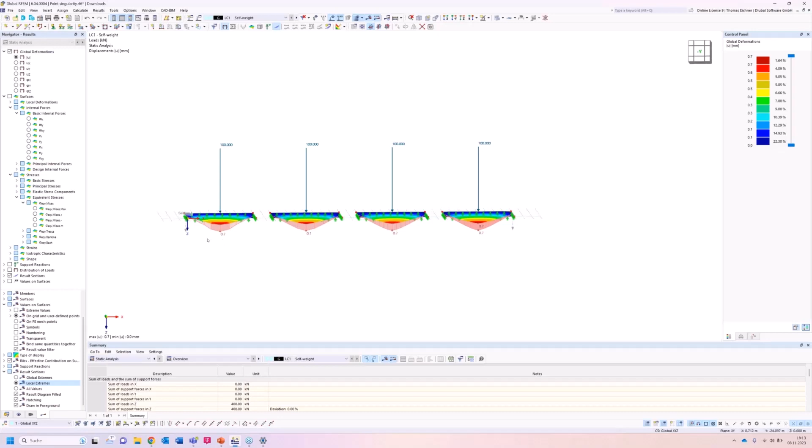But when we switch into our basic internal forces, and I go for the mx again, so I cut, like for example here, then a moment around the corner, around the edge, and we go for it, we can inspect something disturbing.

Now we see it's not the best result, but let's say that the most coarse refinement will lead us to the lowest result. That means if you design now for this value of 37, you could be underestimating the internal forces.

And we can inspect 37 to 61. There's almost like a factor of 2 between those. So that's a real problem, since how should we know how much reinforcement we should put in that area? How should we know how to design this singularity?

And now there are some tools for engineers to help yourself, since you could just say, yeah, this is a singularity and this won't happen. Sometimes it works that way.

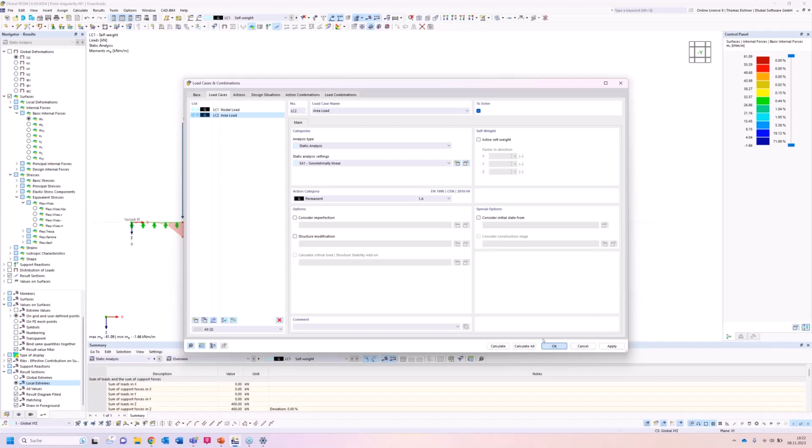And then I will now make an area load with the dimensions of our column. Therefore, I will just delete this whole forces we have already, go into our set view again, and now we have to use the free loads. So we will go for a free rectangular load. The positive thing about those free loads is you just need a surface to assign it on, and you don't need objects to create this load.

So we can go for the center and the sides of the rectangle since we know the center already - we could put in our x and y coordinates by hand, or we could just pick this node, and that's way easier. So we don't need a node, but it helps. The next point would be to define the edges of our column - it's 0.5 by 0.5 in this case.

And then we will adjust the load. So we had 100 kilonewton point load. And now we want 100 kilonewton on 0.5 times 0.5 square meters. That means 100 times 2 times 2, we have 400 kilonewton per square meter on this 0.25 square meter.

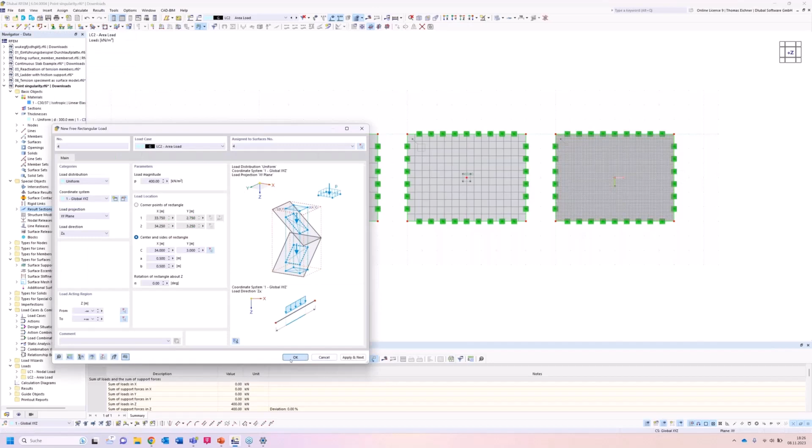Okay, now we can press OK since we don't have any more surfaces to load. Now we have our surface load. You can also see it right here. And we can create the calculation or start the calculation.

Okay, and now we can see the results are way better, right? So we have now this 33 kilonewton meters per meter, and the only black sheep kind of is this on the right. You can see 27.

I won't do this right now, but if you inspect this curve here, you can also see we have more of a triangle right here. But right here we have a parabola. And the surface under a parabola is more than the surface under a triangle like this.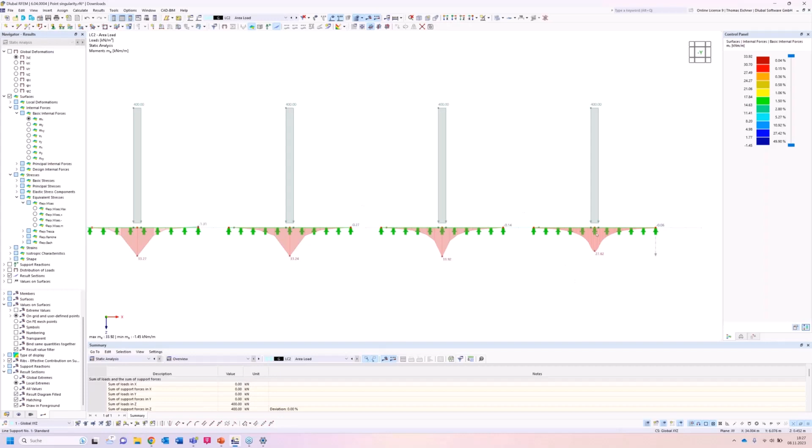So if we would do the smoothing of results again in here, this would be more equal to each other. So a combination of both is also possible for special cases, but it always depends on the effort you want to put into singularities and how much of a problem you see in the singularity.

Okay, so this is it for point loads. And now we will get into our last model we can model together. And that's gonna be a singularity at nodal supports. So we will go for a new name, singularity nodal support. Press OK. I will go now for the 3D model. I forgot it, but we'll just go for 3D model. It's okay.

And we're gonna do almost the same model. Again, 4 surfaces. This time we will check if we have the thickness already with the right thickness. Yes, it seems right, so we don't have to create it new. We can just take the one from the last model and create our first surface.

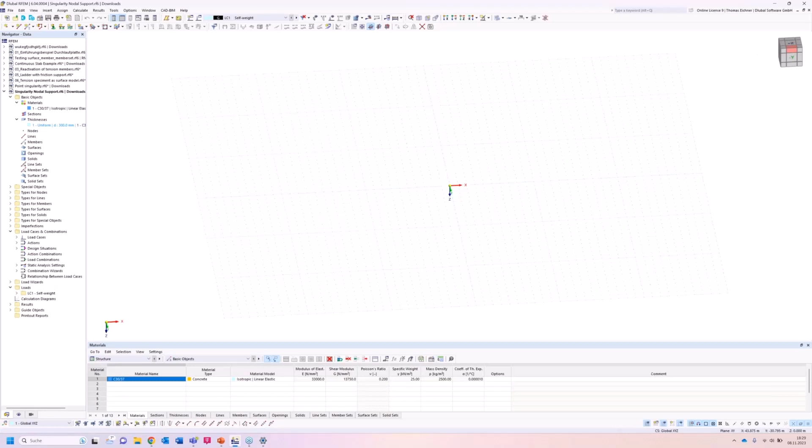Okay, this time I want to go out of this dialog again. I want to go into this Z view via cube, so I will click on this cube and press on this plus Z. You can also throw around your cube however you want, but we will stay in the Z plus direction.

Now we will create again a surface, like I said, with the predefined ones from the last model, and go this time for 8 times 4 meters. Now we will also add the location for the nodal support, and this is gonna be at 2 times 2 meters. Okay.

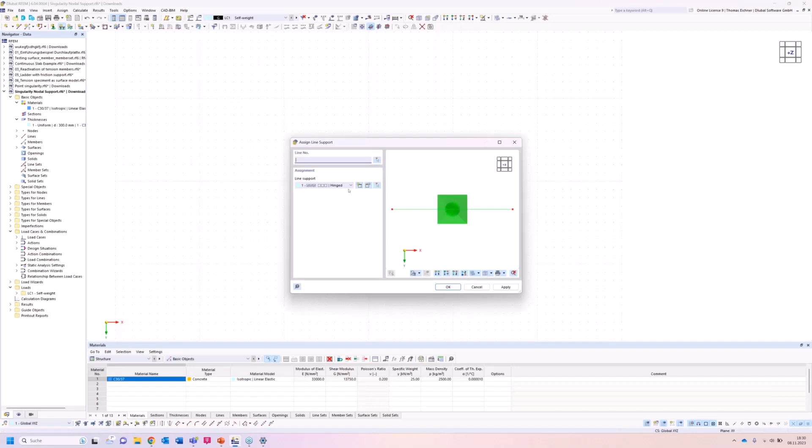Next thing is we will create a line support on the right side, and then we will create a nodal support in the middle. So I will go for this line support right here, and the nodal support right here. Okay, it's not really seeable, so I will adjust the size for a bit now.

Okay, for forces we're just going to be simple and take again 10 kilonewton per square meter on the whole surface. Looks all right already.

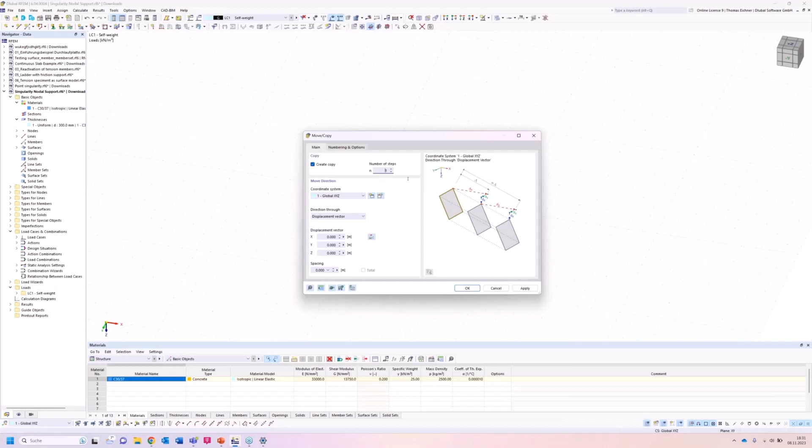And then it's time to copy it again. So this time we're going to select everything and just right click here. Then we can go here on the manipulation, and there we can see our move and copy button. We'll do it and just create 3 copies again, I think 8 meters for this again, so we make 10 meters again. And we're ready to go.

So now, as always, 3 more simple steps. The types for surfaces with those surface mesh refinements. I will just do this real quick: 2 meters, 1 meter, 0.5 meters, and 0.1 meter. The assignment to the surfaces.

So we have our surface refinements and can go on with our special object of the results section. It's exactly the same section as in the previous models.

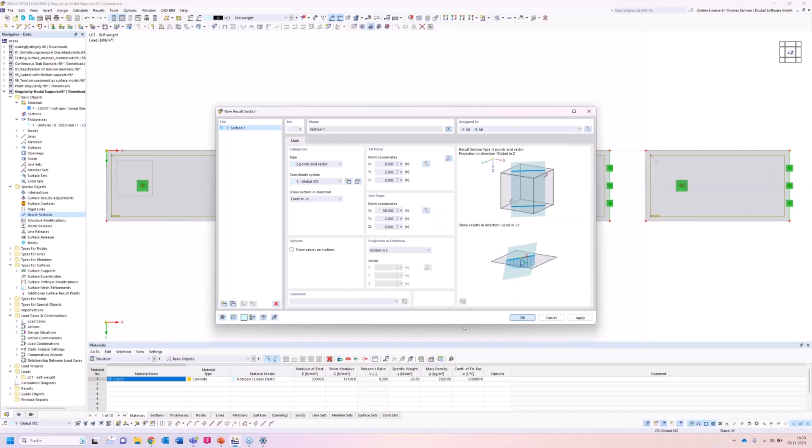The last step, we can deactivate the self-weight. It doesn't really matter, to be honest. These are 30 centimeter plates, and reinforced concrete has 25 kilonewton per cubic meter. 25 times 0.3 would be 7.5 kilonewton per square meter extra. So it would be just 17.5 loading instead of 10 without the self-weight. That's the only difference right now.

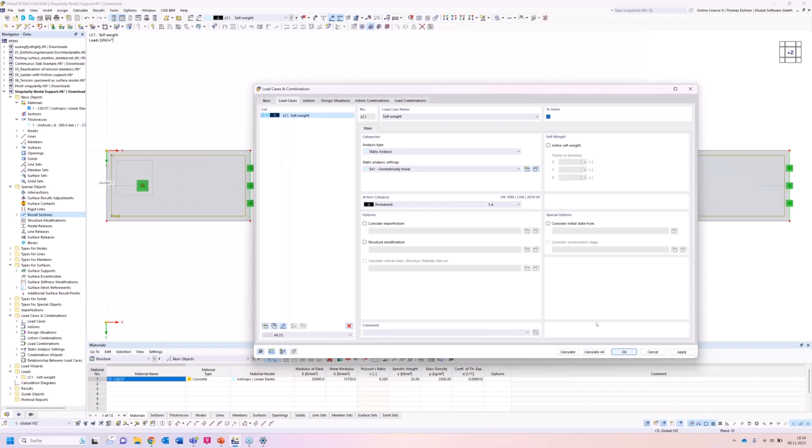So we can calculate it now. And then I will go in the other direction again. It's way cooler with this button. And I want to have the local extremes as values again.

So the first model was garbage all the time, because you see just one element on the left side, 3 elements here. It's just not enough, so we can ignore this. For deformations, it seems like the singularities are not really there, so singularities do not really affect deformations in this case.

There's also a different method, as mentioned in the beginning. We are now working with the deformation method. If you take the other method, the unknowns are not deformations but forces, so also the singularity meaning changes. But right now, and for most programs, almost all programs, you will have the problems in internal forces.

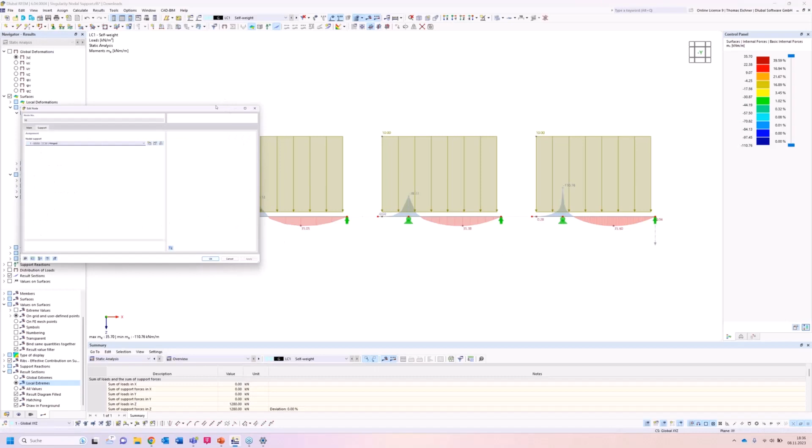And one of those possibilities to treat it would be to go into your nodal support and adjust it a bit. Right here, you can see now there's the possibility to enter spring constant. This means we want to have one in the Z direction, so I will deactivate this. And then there won't be a fixed support in Z direction, but there will be a spring support.

I know the result already. I will just go for 700, because for this model it doesn't matter. It doesn't really matter, it makes just a small difference, the value in here. I will go for apply. Also, we see already our nodal support changed into a spring in Z direction. And then we can calculate it.

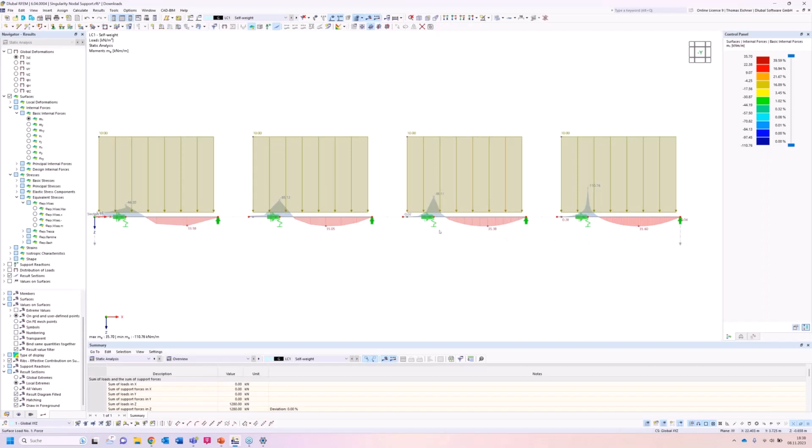So now we're back here and we can see, yeah, it didn't really help, right? The problem with this kind of help is if you want to use springs, there shouldn't be a defined, what's it called, statically determinate system. Right here, we have a line support here.

So this surface can freely rotate around this line. The only thing that stops this surface is our nodal support. That means whatever we do to this nodal support, it has to take everything, so the force can't go somewhere else. The only different thing now should be this.

You can see this here, this is now the deformation. That means this one goes 40 centimeters, it moves 40 centimeters downstairs. So we don't have this belly in here, so it means it takes all the force again, but it deforms differently, since we have a very small spring constant right here.

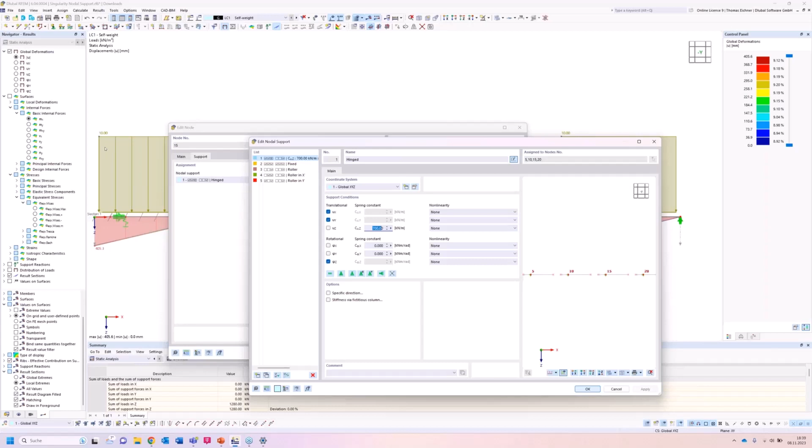700 kilonewton per meter. Could also calculate it, I think. Just taking the support reaction divided by this, and then we have the deformation at this place in the end. Okay, so for this case, it won't help.

For bigger systems where you have walls, and especially if you have a combined system of columns and walls, and you have modeled your columns as fixed, then you will have lots of singularities. So in practice, for especially reinforced concrete, for mid-size models, you would create two models: one where the columns are stiff, and one where the columns are springs, kind of. And then you have two extremes, and you would do some constructive thinking on where in between your solution would be expected.

You can also just go for the spring constant value, but like I said, there are a lot of insecurities in material, in everything. That's why there's this factor for concrete of 1.5, so 50% safety factor for the material.

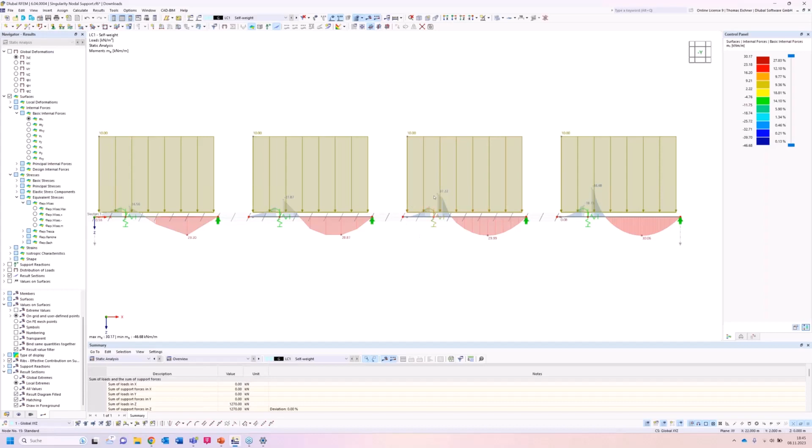Generally, you shouldn't calculate with this — if you have a cantilever like this one on the left, you should take the moment in the middle. So for a cantilever, this option would not be the best one. You could go a different way by using one of the other options in here, like these two. But for this case, we will just say that's not a cantilever.

Okay, so what we see here, we have a bit better results since we don't have this 110 value or something here on top. But we can see also differences in those values, so that's hard to interpret.

What I was doing when I was planning buildings is I would also look at this field moment. You see, this is really similar to this, and that's also not a big difference. It's just a difference because we don't have an element edge right here. So we have here again the wrong location for the maximum.

But then we could think about, okay, QL squared divided by 8 or something like that. And we could also think about, okay, we have here, this could be a fixed support. We could say we have here the cantilever and here it's just fixed. And we could use our general formulas, for example from the Schneider Bautabellen, and think about what's realistic for the value here. Then we could inspect and look which size would fit this result the best.

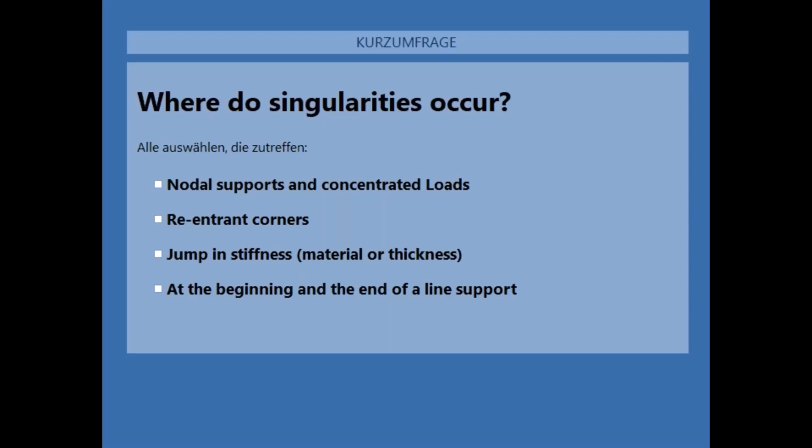Okay, I will close the vote and show the results. So in this poll, everything was right again.

Singularities can be at re-entrant corners, so corners of two walls which come together. Nodal supports and concentrated loads, we just made two models for this. Then also a jump in stiffness, material or thickness. It's just a jump in this. We had in the beginning this formula k times u, and it's just a jump in the k, so it's a jump in the equation. So there will be something strange.

And at the beginning and the end of a line support. Yeah, because in the direction of this line support, at the end of it, it almost acts like a nodal support. So that was the last poll here.

Now I will show you just one more interesting thing on our website. As I said, you can get this software for free as a student. You can just check out all your exam questions and calculate them with RFEM to have a comparison result. You can also have lots of trainings.

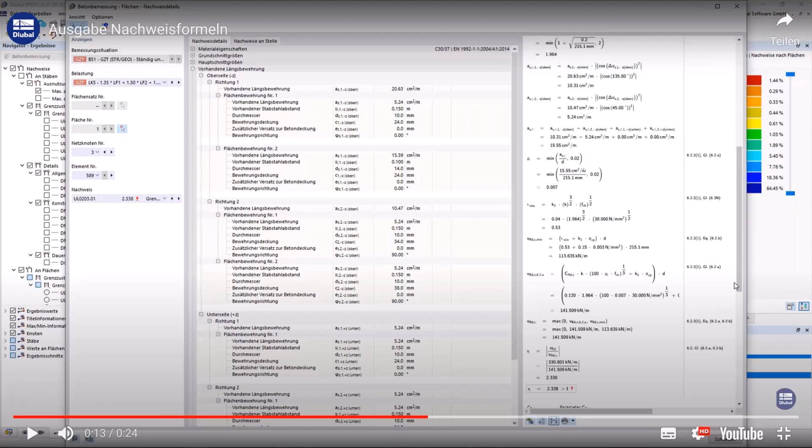And that's new in RFEM 6, and it's really great. So you can just use this in your everyday study.

Yes, the next three trainings will be more detailed on design in reinforced concrete, then steel, and then wood or timber. So check them out - there you will find this printout I just showed you, where you can compare your tests better.